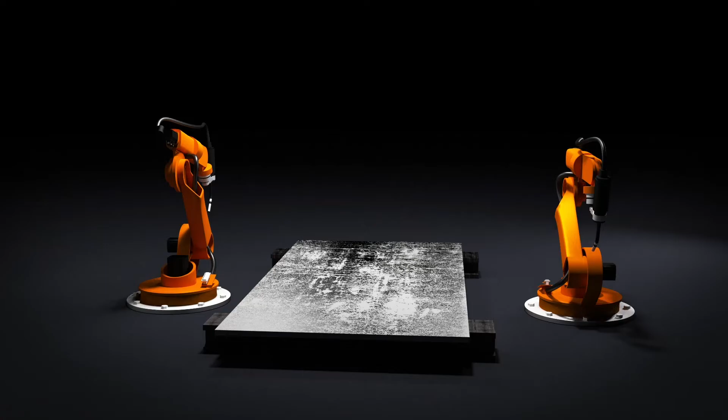All right, here we go.

First blood, first aluminum, first cuts for the project retrofitting Eisenhower's outdoor exterior wayfinding. 2006, you're out, old busted. 2022, new hotness. So I'll give you a quick overview of what's coming down the pipe since we're starting to chew on it.

Like I say, this is first blood. We've got the main monuments out, here's the new one. You got the two side monuments, the two secondary entries, those are out, these are new. And then you got the 12 bangers, the 9 bangers, and the 6 bangers.

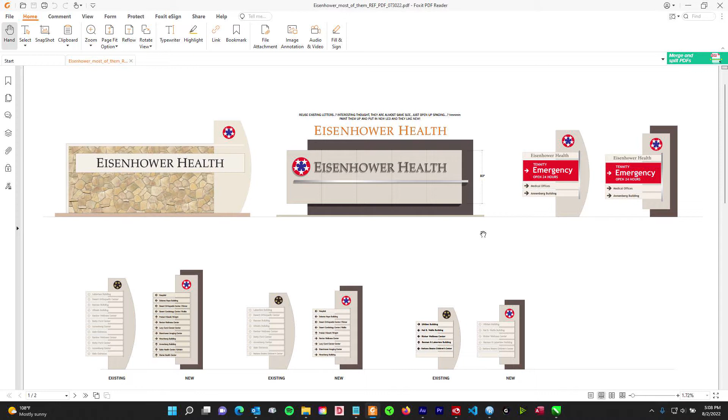It just happened that I started with the smaller ones, not necessarily because they're smaller. It's just that all the rest of these have big poles down the middle, so they're more of the same species. Since these didn't have that kind of pole, but they got taller and basically changed the way they mounted, I wanted to focus my fire on this one first.

So actually this little guy, even though he's smaller, is slightly more difficult versus these other ones here. For those, the pole's already there and I just had to mimic that and translate it into this. But this one, I had to cook up a whole new mounting system. So that's why I focused on the little guys.

But the whole idea is you can see where this one, this one, and even this one-ish are all going to be kind of similar. So you can use this little guy here as sort of a kindergarten. Get cracking on it, and then you'll see the rest of it's going to be...

Dun dun dun na, na, na, na, na, power station.

So power station number 2 actually is the name of that song. Let's go over the lay of the land.

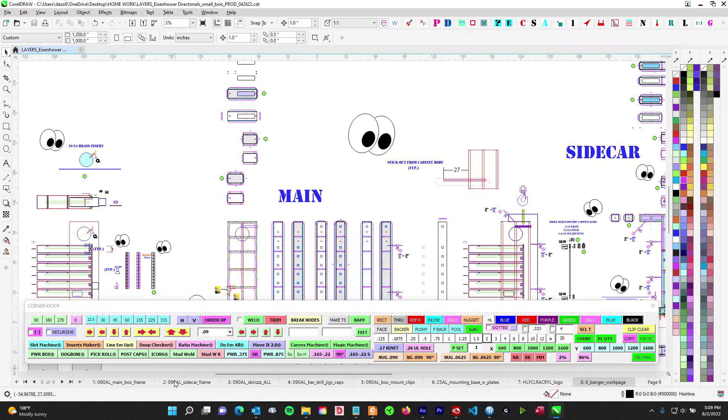We've got ourselves our main cabinet parts here. You have a total of 5 signs for this particular type, so I just grouped everything in quantities of 5, just to make sure everything works that way. Rather than having 15 of everything on one giant piece of paper, I went ahead and broke it down by sets. So just look for that, do your counts.

But this is your main box with the jigs, so look for that. You got your sidecar — this all sounds familiar, right? Got a little sidecar, got a main. Again, look for 5 sets and look for 10 sets of jigs.

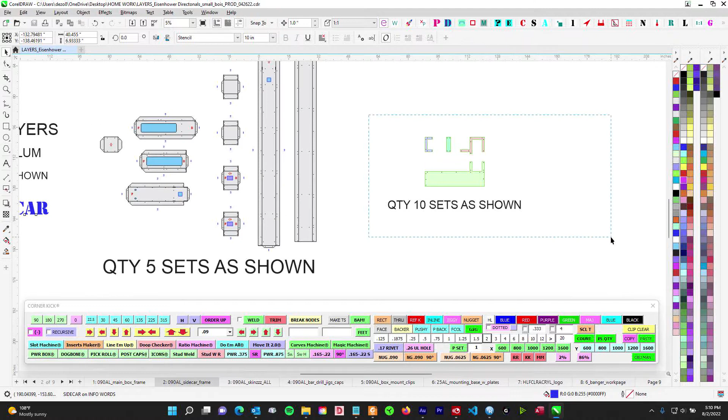To save time, I'm just thinking everything through for you guys — every bend, I think of it. I don't just throw this stuff willy-nilly and make you stand at the brake. Don't curse my name in vain saying, oh, how dare you, always making me bend stuff. If I can try to save some bends or save some jig time or whatever, I do.

Every time I make you guys go to that brake and bend, I think of it and I whip myself a little bit just to feel your pain. So don't think I'm just tab-happy and make you stand there bending all day long. I can feel your tears, your sadness.

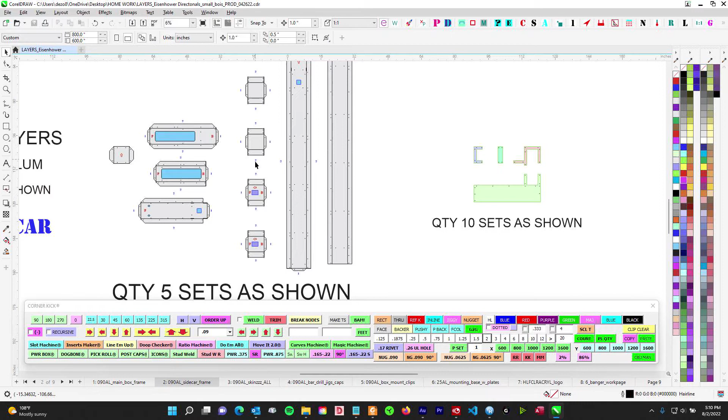Anyway, swing low. So this one is just going to have no jigs. These middle parts here will be jigless, they'll be internal. You have your skins, the main frame.

I do have them directional — technically they aren't, but it's just easier this way. So look for 5 each there. And then these ones for the sidecar are exchangeable, doesn't matter, they can mirror one side or the other, doesn't matter. So look for that.

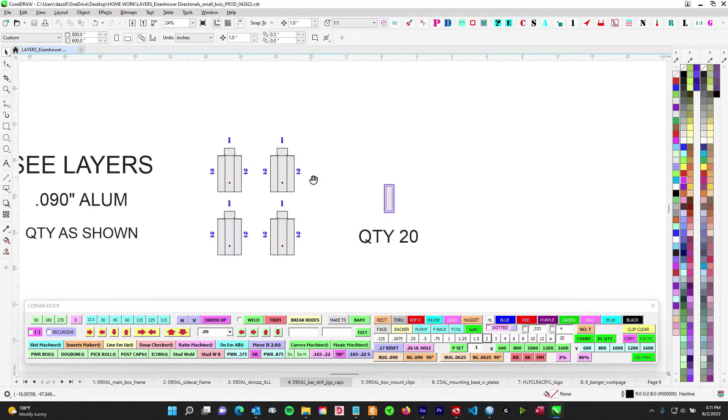I'll go over these little jig bars, these little drill jigs for the bars. We're going to be doing it different than the ones that are there — we're going to flip it around and make it easier. We're going to use riv nuts, and the keyholes are going to be in the skin this time, much easier to get on and off the sign.

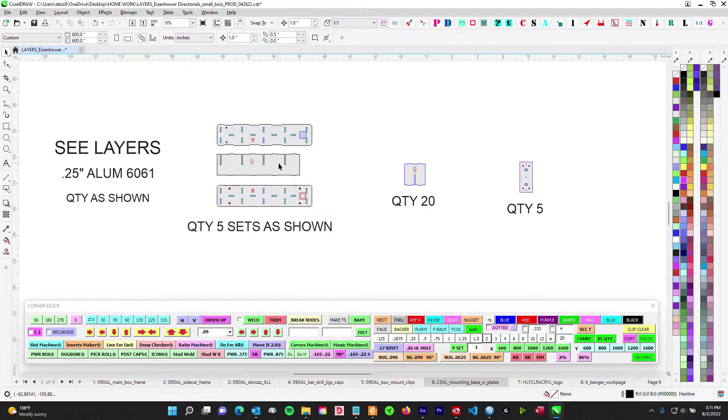So anyway, we'll go over that. You've got your quarter-inch mounting box plate thing. We'll go over that—that's how the new sign is going to mount to the existing one. And then just look for some clear circles. You do have brass inserts.

So like I say, you've got a main box, you got a sidecar, and you've got some mounting box down here. You got your jigs. So I know there's a lot of eyeballs, which usually means look over here, look over there. There's a lot of stuff. But it's nothing we don't normally already have done, even recently.

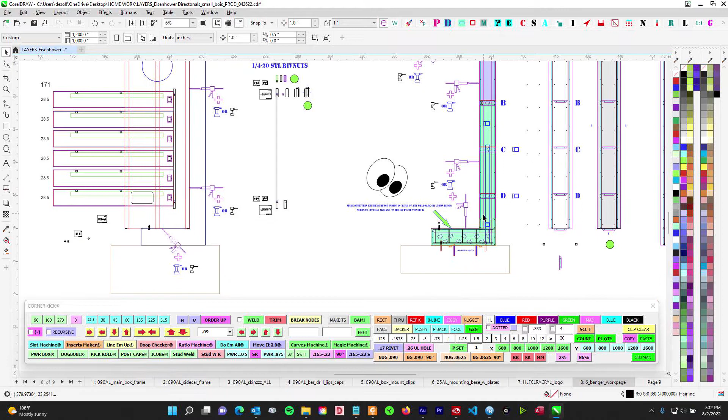You got a main box you're going to build first, and then you're going to go ahead and build off of that. I think that's how you guys do that—you go build off and start attaching those to the side. I want to see Lords and rivet, or go ahead and shoot your screws, either way. But you want to Lords these onto that frame, make sure it's nice and strong. And then you can go ahead and build off of there.

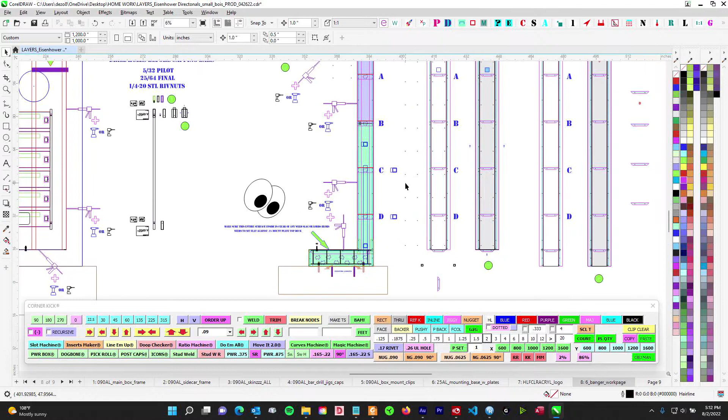Like I said, A, B, C, and D are jigless, so they're going to fit inside and just tack it in. Make sure that I do have C and D—I didn't mark them, so just to save time, but you do have a face and a back. So front, or face, is the way they face towards the boxes. So technically this side here is the F, and the back will be the B side.

So if you see where the little 2x-pole post, whatever tube is going to be, it's towards the back. So you want to make sure these face the proper way. Otherwise we're going to be kind of very sad, because these are going to be locked in. But I want to have that little bit of movement so that when they're sliding this thing on, there's a single lift point up here.

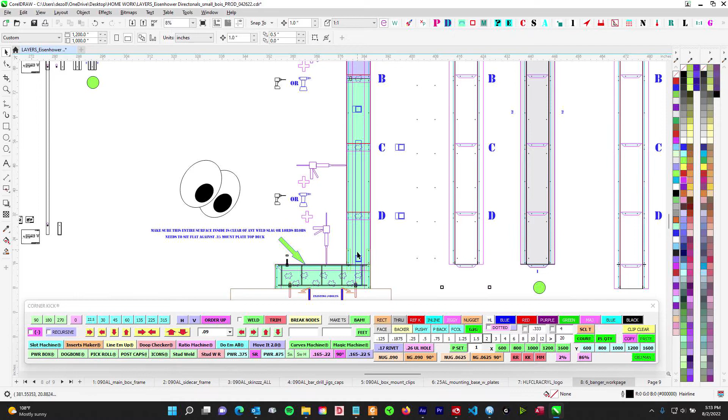They're going to be sliding this onto this piece of tube. They're not going to be able to see it—it's enclosed. So this one here, they'll be able to look under and make sure they get that lined up first. So this one is truly just a straight square, but as it slides up, it's going to hit this one and hit this one. That's why I didn't want left to right, because this is going to lock it in place.

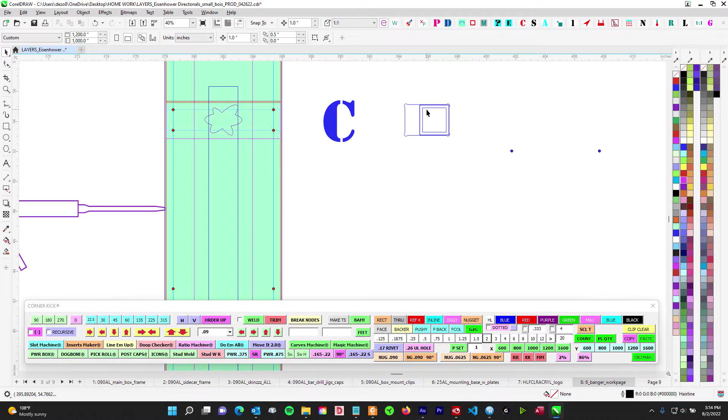But I wanted to have some maximum flow to the front. So again, make sure C and D face the proper way. And then A and B, like I said, they're not marked—it just means A and B don't have the slide through.

Again, with production, every little bit counts. So I didn't want to just chop a hole in all of them, because that would be a waste of time. A and B, for what it's worth, are symmetrical, so don't worry about front and back, arrow. So just again, C and D, make sure those go the right way and that they are the bottom ones here. Otherwise, very sad days in the village—many deaths.

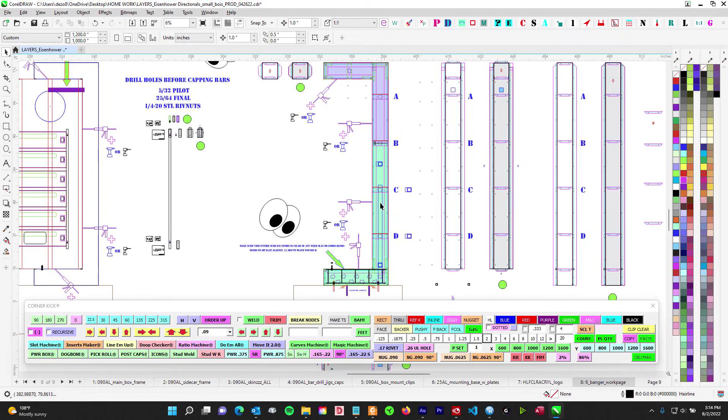So go ahead and build your sidecar off of the main frame. Once you get the main frame all done—probably build the main frame first, I don't think I'd skin it yet though—go ahead and make sure you get this. You can shoot all your rivets and screws from the main frame box into this. You're not going to have any room to go this way.

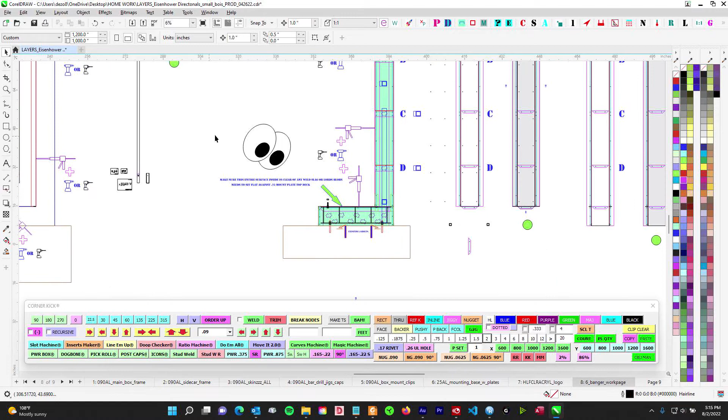So what these eyeballs are pointing out is something we haven't done yet—always something new. As you know, the existing sign just has two J-bolts right here that hold this whole thing up. So there's no pole or anything. We were kind of brave the way we did it, but it works.

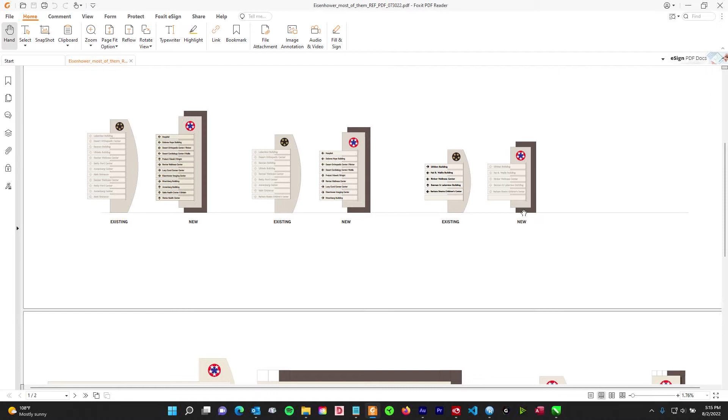But being that this one's a little bit taller and wider, there's a lot more going on, and it sort of cantilevers the weight over more than this one did, because this one counteracted the weight. I wanted a much more substantial way of mounting this. And since this is going to teeter forward, hence that post in the back, that tube—so I did some math, I went ahead and weighed each box.

So you're almost 30 pounds. Just in these boxes alone, you've got almost 200 pounds once you get these boxes installed. So that's why I wanted to counteract the front lean.

So the mounting structure is going to look something like this. It's going to be 1/4-inch plate, dog bone and slot together, as you know. So you have a top here and you have a bottom here.

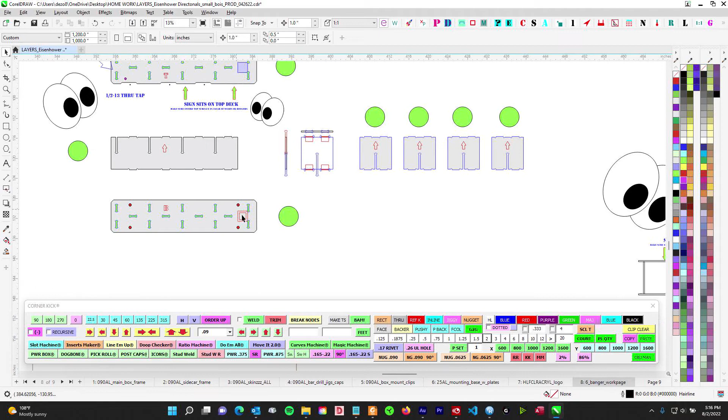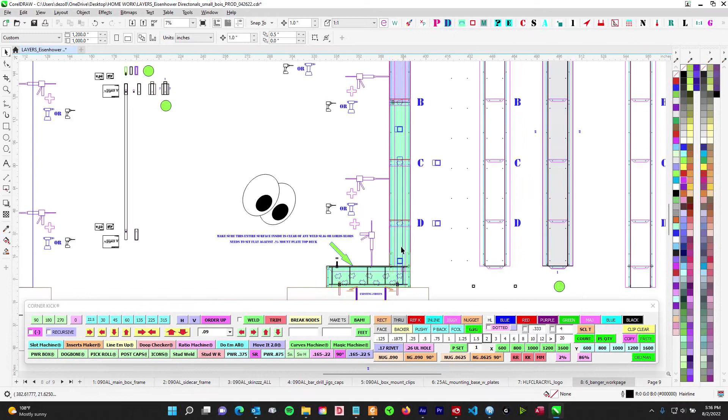And then it's very important to double check that this guy is at 90 for sure, because as you can see, this is going to slide down, bonk. And then I have it right up against the back here. So that way, when all that weight is kind of pulling forward, it's going to lean up right against and lock forward, bonk, and lock forward, bonk.

These are the only 5s that'll have this. So if you want to just go ahead and bring in a stick 1/4, that way you're welding 1/4 to 1/4. It'll be nice and strong. And you can get all 5 of them out of one stick.

What's up, Edgar? So you'll slide that in there.

Again, this little looky here, just throw a quick bevel, so it's easy for them to slide, a little bit easier for it to slide on, because they have to clear this one and they have to clear this one.

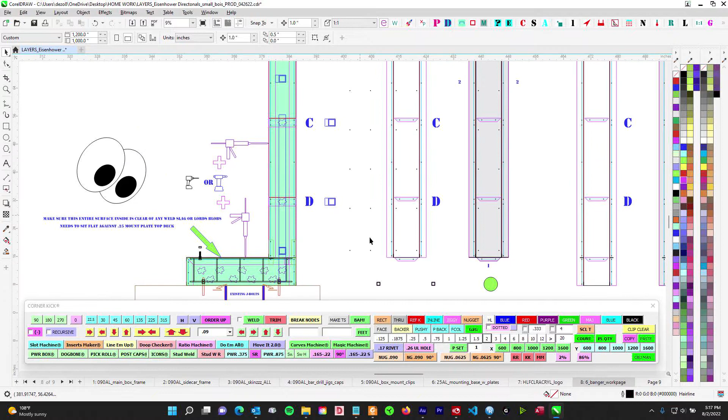So weld this up, and once you get it all tacked together, just burn, baby, burn. You're going to be able to burn this plate to this fully on there. You'll have a nice fillet weld.

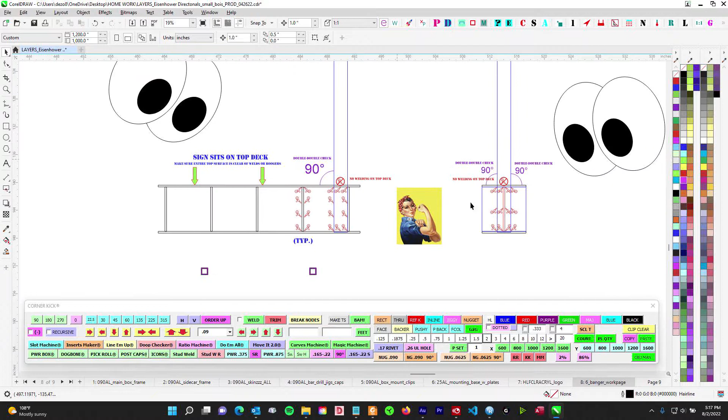That's this plate here, this back plate right there. You'll be able to burn that right on there. And then on the, you'll see there, and then you'll be able to burn this. And then this plate dies out right up against there.

So if you look at this top view, yeah, so this middle spine, which is this spine right here, this dies out right up against the post. So you can see where you're going to be able to get fillet weld. You'll be able to fillet weld this plate right there. So this post will be burnt really well.

But the whole idea, again, this one here, you want to make sure that you keep, there's no welding up here, because this is going to sit, the sign is going to slide over this whole boot thing, and it's going to sit right on that deck. That I'm calling it the top deck there. So that 1/4 inch plate top deck needs to be free of any burrs.

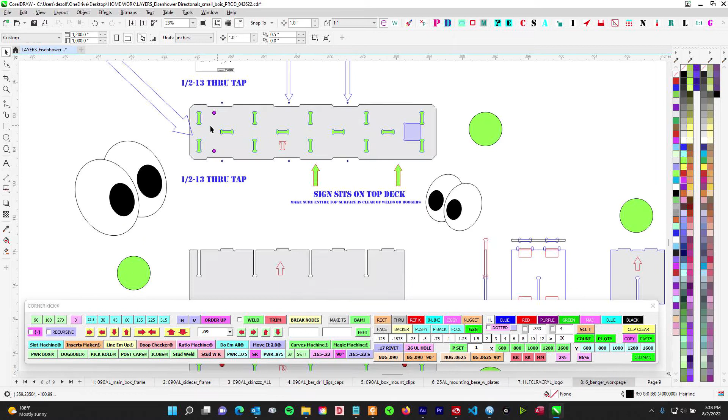It needs to be free of any welds, any kind of accidental blobs or anything that's up here. Make sure you clean it nice. And that's why I'm saying you're not going to weld on the top side around where that is, because the sign needs to sit right flush. But otherwise, you're going to burn all in here.

Everything's fine. The other thing you're going to do, just like you do with our Mjolnirs, so it's the same setup. You got the tools ready to go. I would bring in some taps just to make sure you got enough, but you're going to do just like you do on your Mjolnirs.

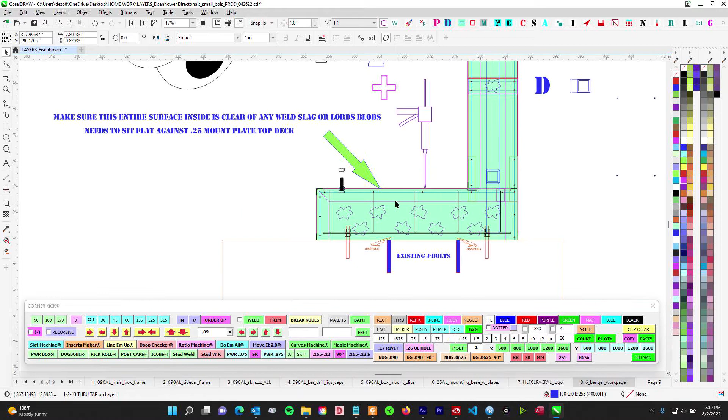You're just going to take your drill and you're going to burn through with a 1/2-13 tap right here and right here, the top deck. Those two are what's going to actually hold down the sign once the sign's put down. So basically this post holds it in place, keeps it from tilting, keeps it left to right.

And then when this slides down, Install has access right here. They'll reach in and they can bolt this bad boy down. And then that way it'll keep it from moving around. So again, that's all you got to really do to this is burn it up really well.

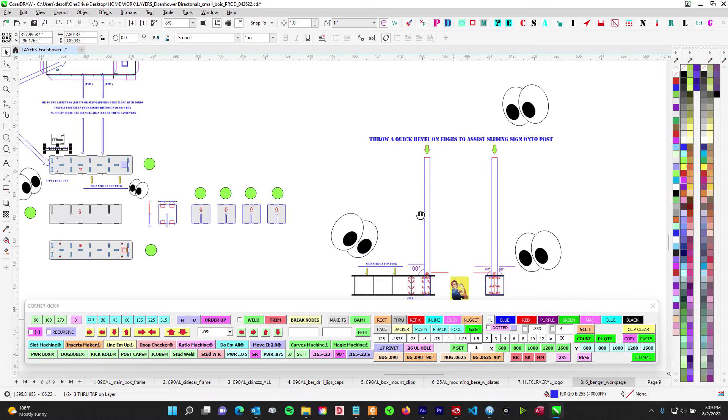Make sure your stick is square. Keep all your welds below, make sure it's clean. Then go ahead and tap it, run through, and you can wait till after prep or whatever. I have a 2-inch bolt right here.

So a 2-inch fully threaded bolt goes right through, and that gives plenty of room, I think. So maybe a 2-inch will be fine. More is better, it's fine.

So now you can see where all of this takes up this bottom cavity. We haven't really done this before. So all I really did was, instead of how in our monument signs we have a 2.5-inch pocket down here for our Mjolnirs,

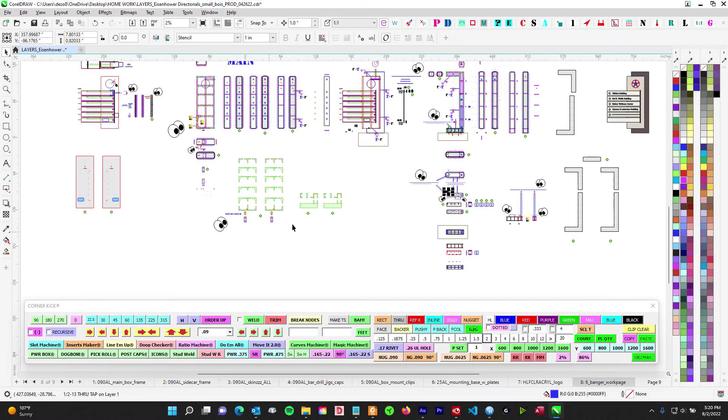where we take the bottom and flip it over on all of our monuments, all I did was stretch it to 8 inches. That's all. So you just have this uber jig cavity here.

So this is all one big inside jig. You're just going to tack the frame around it like we do. You can even tack it on the inside there and clean it up, and you are clear. You can see how much room there is.

You can weld on the inside of this pocket cavity inside the sign. You can weld all the way around there as well. Make sure it's all fine in there, because you can see how much room I have here.

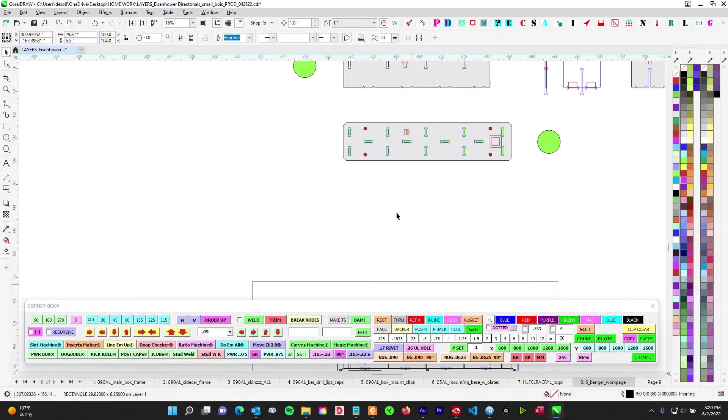Now, that being said, once you're done welding up in here, you can weld the jig to the flange on the inside. Then you can weld it around the outside here, get down on it, make sure it's nice. But once you're said and done, you want to get back inside here with your little peanut grinder.

You want to make sure that this inside is completely clear of any weld blobs that might get in there or any welding slag. Because again, this surface, looking on the inside of the bottom here, this whole surface of 09 needs to sit nice and square against that quarter-inch plate, that top deck I'm calling it.

So anyway, that's all. Just make sure that's all nice. But I think we'll be fine, because this runner here comes all the way down.

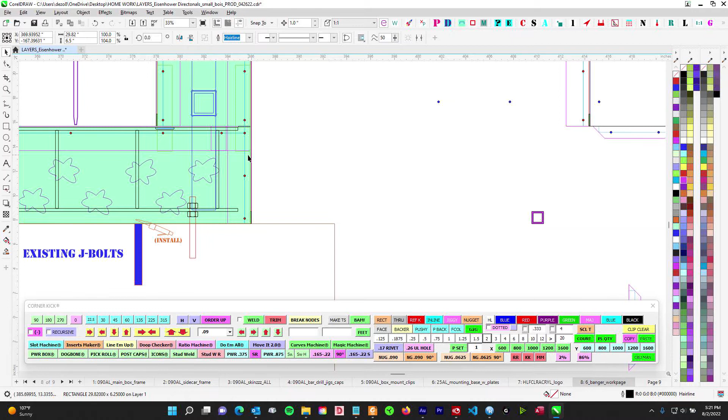So essentially you have the face of 090, you have this frame of 09, and you have the underneath 09. So you're almost pushing 3/8 of an inch close, or whatever.

So I think even this sign sitting just on the ground in the shop should be fine, because you'll have skin 09 this way, and then you'll have another piece of 09 jig all the way across. So for strength, I think it's going to be fine, but it's essentially one big fake skirt.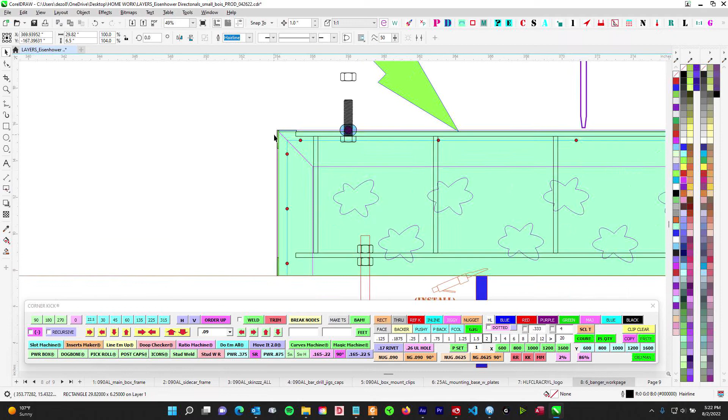So I know on install, for Jonathan, the other signs have a little removable thing here. You don't have to worry about any of that. This whole sidecar, other than the top lid for lift point access, the entire thing is sealed up, which is awesome.

So just Bondo it, clean it up for prep, and we're done. You don't have to worry about little doors and little openings, so just this bottom one, you slide that off. That'll be your access to get to there, and that's it.

So I think that's it for sidecar. And then, like I say, this is just an 8-inch version of our flipped over design. Just make sure all in there is clean.

But you can weld all here really good, make sure it's all good. Now, when you go to put the skins on, you're thinking, remember the Indio letters, these little splooches look familiar.

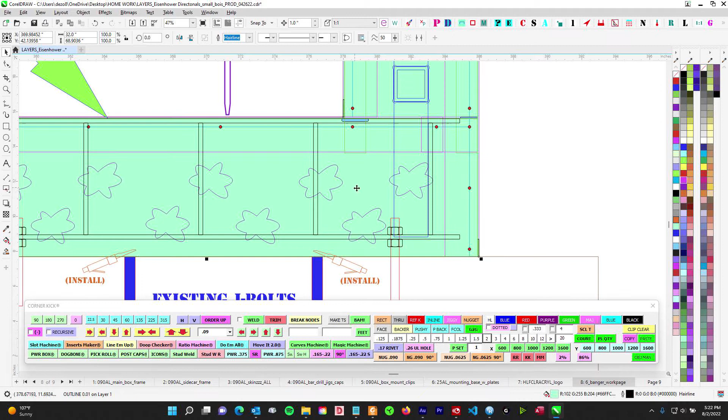As I just said, you have 090 frame here, and now you have an 090 void. This whole thing is an 090 void above the skin. Now on the Indio letters, I gave those little discs to float, saving time, whatever.

I think we're okay here. You're just going to Lords really good all the way around, and then go ahead and just put some good blobs all in here, like good quarter-size blobs. And then that way it'll squish out.

And once those cure up, I think those will be our connector buffers between the jig that's back in 09 and then the face that's 09 forward. So that's that. And then, like I say, the one downside of the jigless design is that these are back in 090.

So you don't get that Lord's love. So again, just go ahead and put a blob on these. And then that will carry out that, I can get rid of these so we can see what's up.

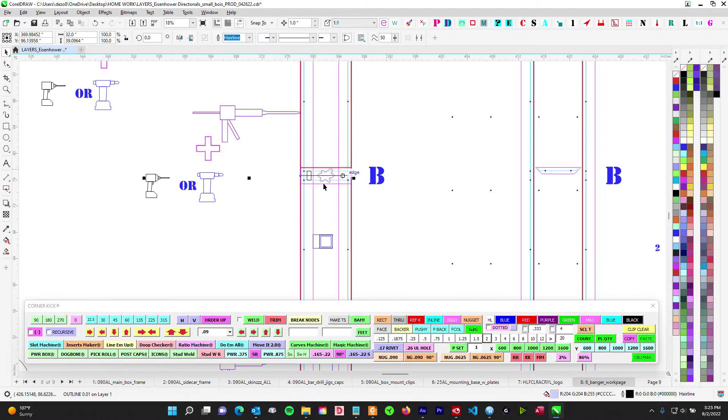Make sure you blob these up really good. This is only 8 inches across, so it's not that big a deal, but again, it's unsupported right here, so go ahead and blob it up really good.

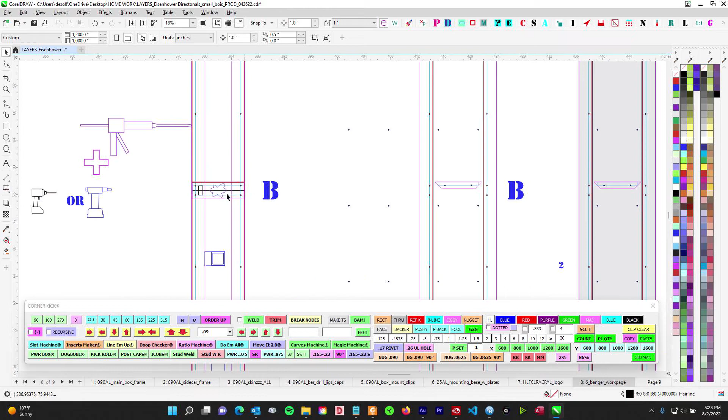And this is a seam as well, so I don't usually like to leave a seam live like that too much. So again, it's going to be very important to just goop it up really good and let it cure. Let it squish out the seam, maybe even inject a little bit in there and then scrape it. That way it'll seal it right up. But you can see where your skin is going to be right there.

So I tried to keep it simple, less jigs, that kind of stuff. And right here too, I don't really have a crossbar because you need access for your lift point straight through. So this is just a piece of metal, a single piece. So don't lose that one. There's not going to be any descriptor on it, so it could look like just a little piece of scrap floating around. So just keep an eye out for that, keep a weather eye, Lords it up, and that will give you a little splotch point too right there.

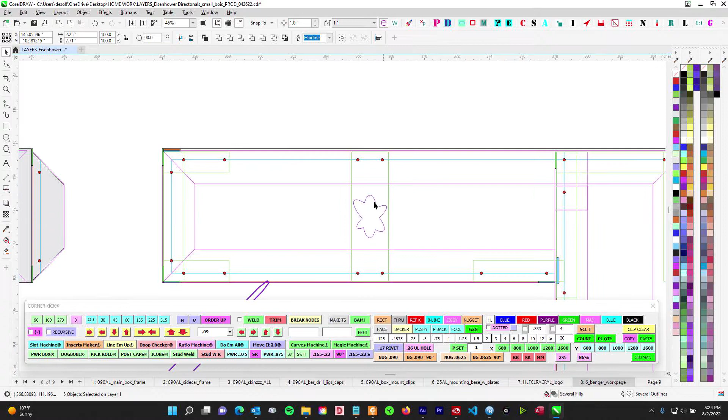All of this is exposed frame. This will sit fine, that's all good there. But put a little splotch there, and that'll seal that up. But you do have a door on top. So that's sidecar, and I think you got all that now.

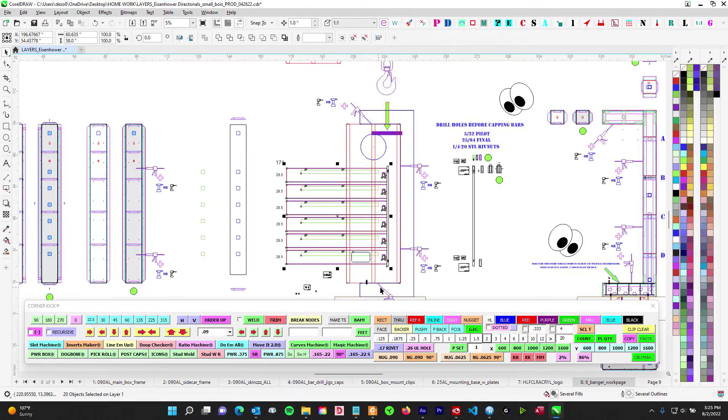So then we'll talk about mainframe. Mainframe's super simple, other than, like I say, you got 200 pounds, which isn't that bad. But once you get this all installed, you got 200 pounds, and that 200 pounds has to work its way down to basically these epoxied in studs through the 1/4-inch plate frame.

That being said, I kind of wanted to beef up this main box, so these jigs are going to be beefier than normal. Because they're going to be taking all that stress from the 2x2s and working it through the face and shear, through these 2 bolts and then getting it to the ground. So we want to make sure that everything's welded up nice and tough. Just weld it up good.

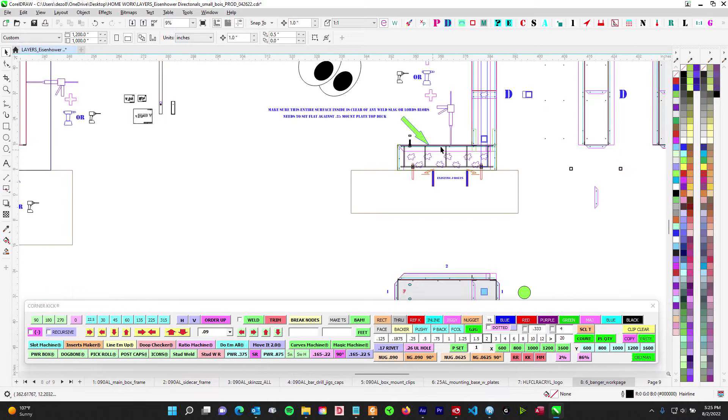I do have a notch here for that plate, so you're going to have a piece of 1/4-inch plate. It's universal. I do have the 6 points here where you can mount the for Lordsing and whatever. I have 6 Cleco spots that match - there it is, so I got these 6 Cleco spots here, so you can line up the mainframe with the sidecar here. But of course they go there, so that's all these holes are for, so you can clearance whatever hardware you decide to use to put these together.

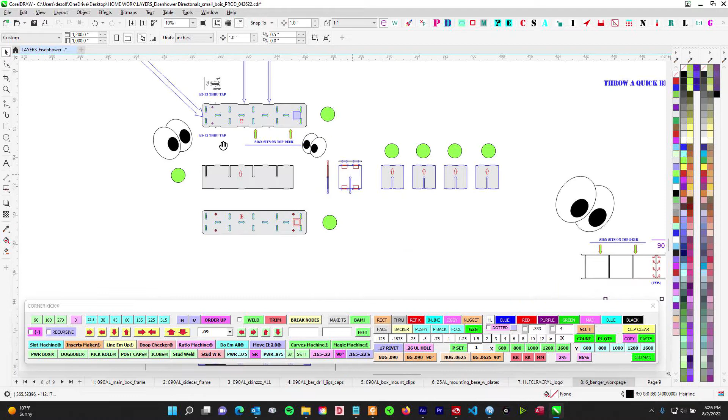But look out for that 1/4-inch. That 1/4-inch will notch in, so you can weld that 1/4-inch really well to the actual jig. That way we're transferring massive load through here, make sure it gets to the 1/2-inch bolts, and then the 1/2-inch bolts get it right to our epoxy bolts. So everybody's happy, physics is happy, Isaac Newton is stoked with his apple and all that.

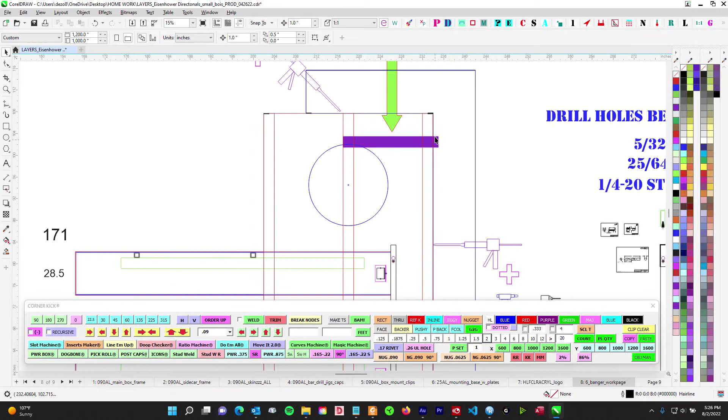So I think that handles that, nothing you need to worry about. You do have a slide through here, just a 2x8 is fine. The 2x2 single lift point works its way through both, and that way it's catching both here nice and strong, but you have access through the top install. You'll go straight through, I think a single cinch will be fine. This isn't going to weigh that much.

So, okay, so you got your frame, you got your sidecar built onto it. You know what you're doing here, you got this all sexy. So let's talk about our clips here, the clips and the bars.

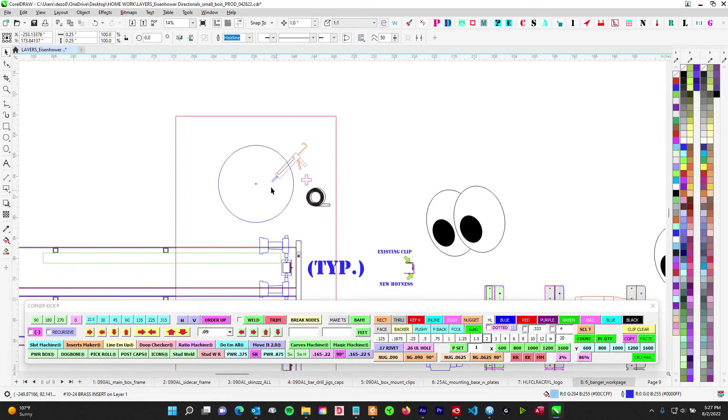Let's see real quick, I'm going to go to the brass insert. Heads up, you do have a brass insert. This is just a piece of 1/2 inch, doesn't get any easier than this. You're going to just do a 1/2 inch clear, tack in, knock in one brass insert. It goes out to paint, this is just going to get straight vinyled. And that way you'll have one single hole in the face. That's all you need, a 10-24 stud, like 1 inch, and that way it's instantly aligned.

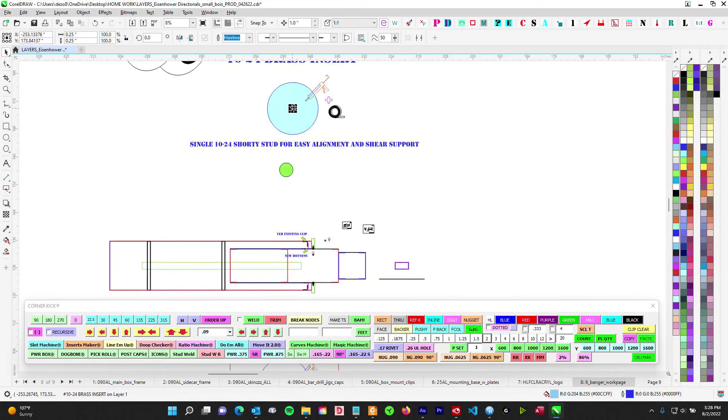You'll just do silicone and some tape, and then you can steering wheel it on there and make sure it's nice and straight. That way the vinyl shop doesn't have to worry about a level line or anything, they can just go crazy with these and slap on the vinyl. When it comes time, all you got to do is put one little stud in the middle that lines you up in your hole, and stick it down, good to go. That gives it shear strength, it'll never slide off. Don't worry about reaching in, you're not going to have access. You can see where it's actually behind the frame strut on this side, so don't worry about putting a bolt on it. That's it, just silicone and whatever.

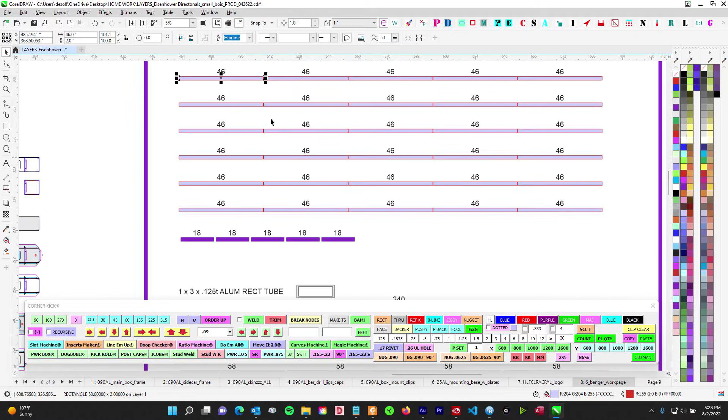Now that's it, all that's left is the bars and the boxes. So let's look at what you got to cut. We're copying what we already have existing-ish, so you're going to cut these at 46. This is just 2x2 by 1/8, keep the weight down, keep it cheaper. It's all we need because each box is only 30 pounds, so it's fine. You got one stick, you can cut all of this. This is good for one job for these particular signs.

Going forward, the other signs have the pole down the middle, so don't get ahead of things. I haven't figured that out yet, but I think the pole is going to chop these, so they're probably going to be shorter. I have to figure out how that pole is going to attach.

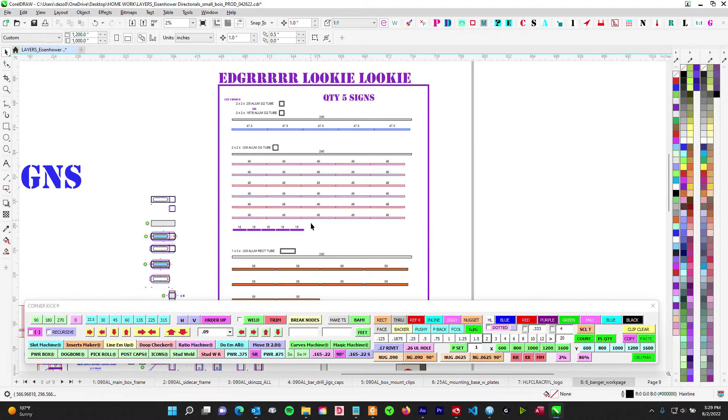So this is only for this job, the 2x2, but you will have a whole bunch more of this coming. If you want to bring in a bunch of 2x2 by 1/8, feel free, we're going to need it. Also the 1x3 by 1/8, this is enough for these. The other signs are going to have those too, and they're even going to be longer. So again, if you want to just bring in a bunch - I forget what our numbers are on these, but they're more than these. We got plenty of material requirements coming.

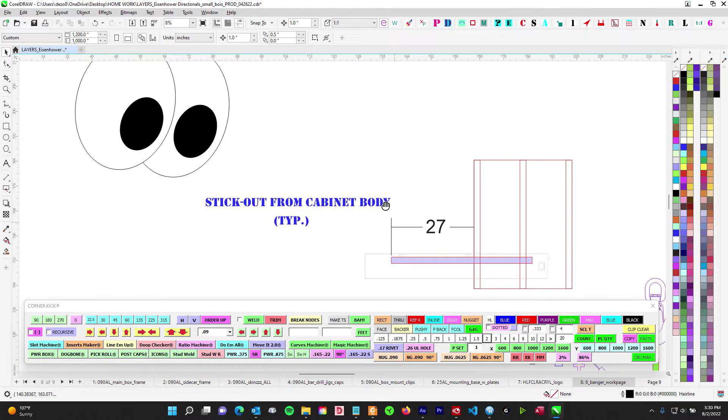But you do want to make sure it's strong. It is a double-edged sword, but you want to weld it to the 09 face very well, and weld it here. You can weld it on the backside too, it's fine. You can weld it back here, or weld it on the inside, either way, but you want to weld it here. Now keep in mind, when you add up a 2-inch weld here and a 2-inch weld here and a 2-inch weld, it's going to want to shrink this whole face.

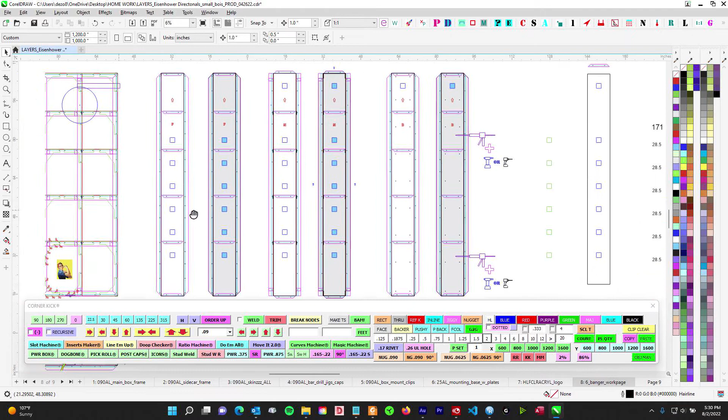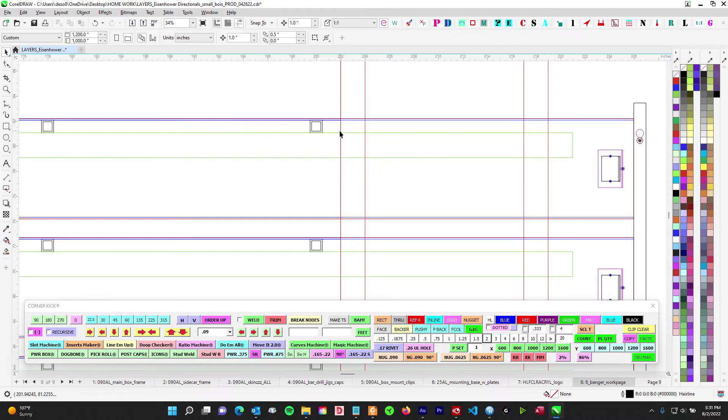That's why it's important that we have these bigger jigs to fight the warping and the shrinking and stuff, so just keep that in mind. But it's important - I don't think we need 8 linear inches, I don't think you want to burn the whole thing all the way around. If anything, maybe you want to burn horizontally, because a vertical burn of 2 inches is going to shrink it that much. But if you go across the top and the bottom, then the shrinking is going to happen horizontally, which I think is better. But we don't want to burn - we're not looking for Instagram weld porn.

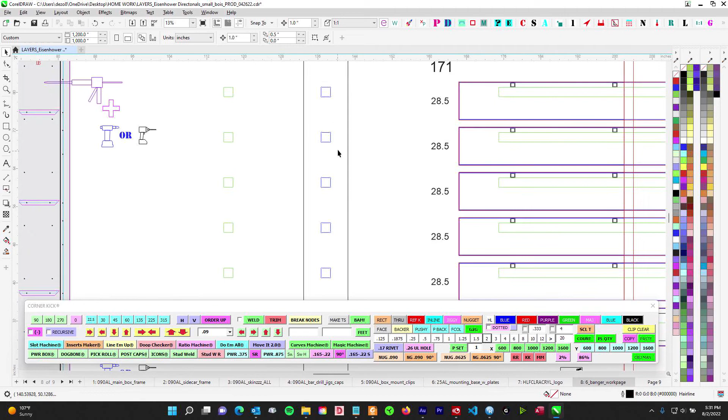You don't want to burn all the way around, but we do want to burn these in pretty good, so use your judgment on that. I think maybe top and bottom burns, George burns, might be better, because full 2-inch beads all the way around is going to want to shrink this whole face pretty good. It's going to put a lot of stress vertically. That's why I say make sure you tack these in pretty well.

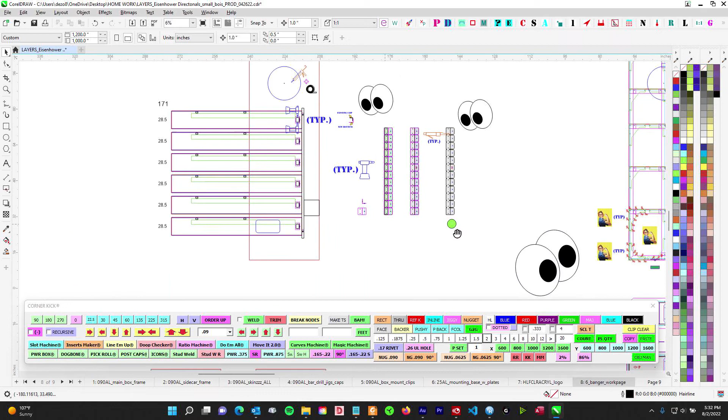Throw on maybe some little welds or little beads instead of just tacks, because it's got to hold up all that weight, and it's going to put up with all that stress and tension when you go to shrink that face, when you put that heat into it. So necessary evil, like I always say with welding - you got to weld, but it sucks because it destroys everything.

So anyway, build the frame, slide those in, get those welded in. I think you're good to go at that point. Then your sidecar's all done, and I think you can close it up. Make sure this guy's in there.

I don't know if you want to just Clecos that in - I got 193 Clecos. But I don't know if you just want to tack it, because you're going to be tacking this in here anyway, so you probably could just tack it around the edge, make sure it doesn't go anywhere. It's going to get sandwiched, that's fine. So make sure that's in there.

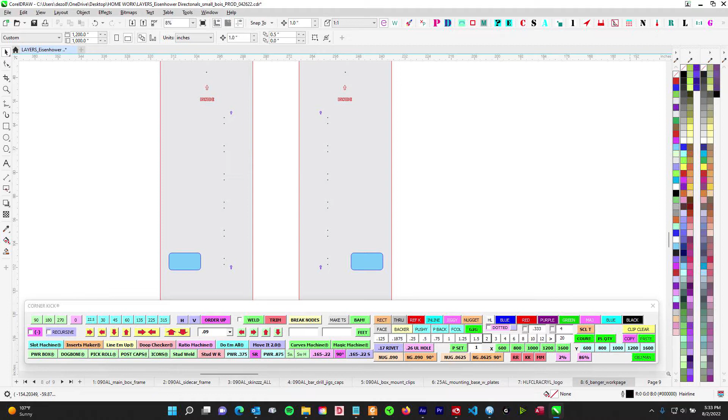And then I think that's good. Then once you get your faces on, you want to Clecos these on. Let's see, I haven't sent these yet, so I want to make sure this is really clear. I'm going to put an F here for the front just to make sure you know. I can assume that you know, but the bars are to the back, right, and this little cutout's to the front, but I just want to make sure, so I'm going to update that. Holes to the front here.

And then you're going to go ahead and Clecos these on, close it all up, and then Clecos on the sidecar faces, close all that up. You're fine. Once that's done, I would powwow with John G as far as the clips for the boxes - what do you want to do there - because you're going to rivet these on.

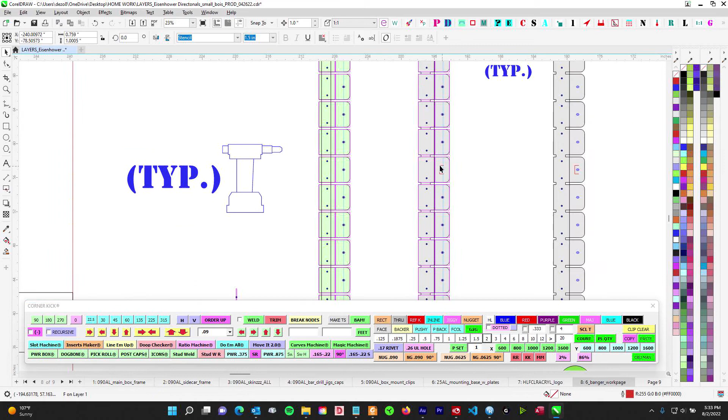So here's what's up. I'm just copying reverse channel tabs. You're just going to take 09, you're going to clamp this side, right, clamp it, bend it 90. Perfect.

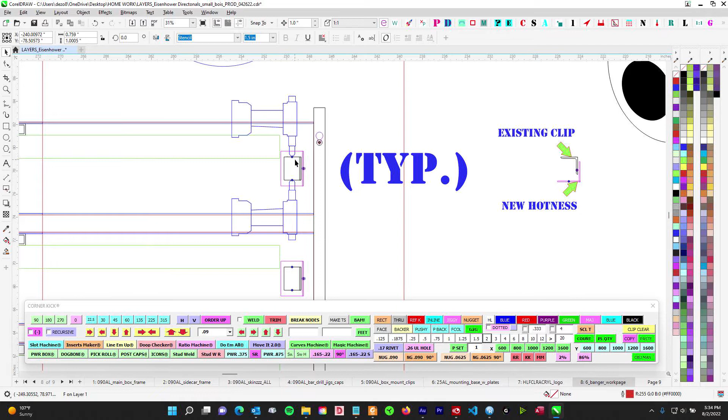Now you want to rivet these on. I know sometimes you play it fast and loose and sometimes you use self tappers instead of rivets, but the self tappers - this isn't clearanced for a bigger hole and then a smaller hole, and it'll never clamp, and you're going to get shavings underneath, and they're going to be 4-by. You want to just cut these off and then rivet both sides, especially now that you have air back in the shop. You're good to go.

Rivet these on. Now that these 90 clips are going to be sitting there, does John G want to deal with that? Do you want to send this to paint after? And do we want these painted?

Don't even cut them yet. Maybe you just send this stick out, he paints this, he paints all this, and then with some time before you get cracking, you can go ahead and cut them and then just rivet these on like as a last minute thing. Or we don't even paint these, but we just paint this.

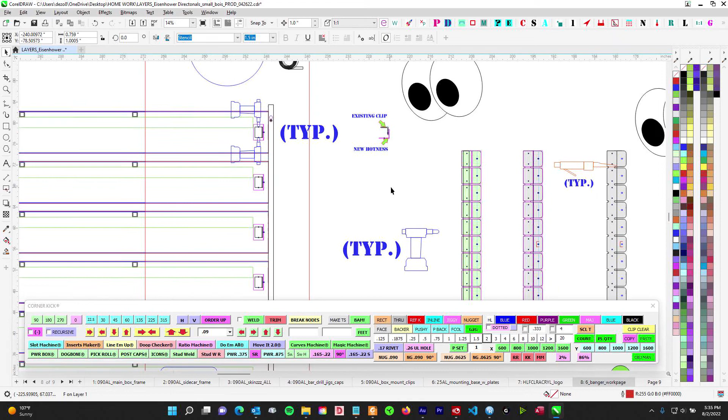Whatever's easiest, work it out with John G, whether or not he wants these clips. But the idea is, just like reverse channels, you're just going to bend this as one, and then don't worry about it being pretty. You're just going to cut down the middle, whether it's a bandsaw or whatever, and then make sure the burrs on the back are kind of cleaned up.

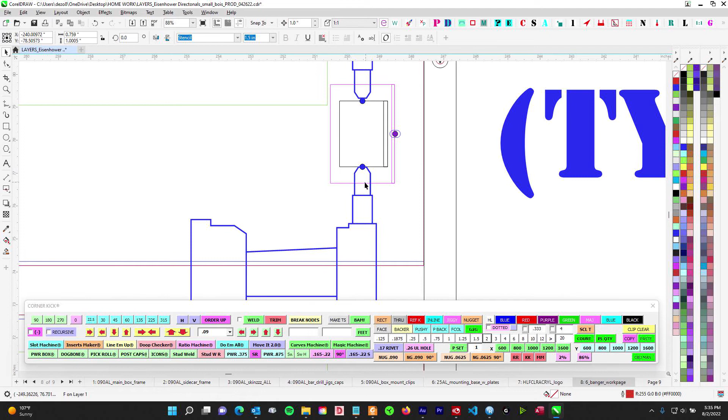But you don't even need to flush cut this, because nobody's going to see it. Even if the little cutoff tab is just sitting right here, nobody's going to see it. The box is going to slide over it. You'll never see it. So kind of down and dirty kind of thing, but it's going to save us so much time.

What took us months before, or weeks let's say - it did take a good solid week to make these tabs out of 2x2 and all that. It's just going to be almost instantaneous. So we're so far ahead of the game, it's great. I give you one extra tab, but there's 12 tabs here - that's enough for all boxes here.

Talk to John G about prep. It might be easier just to leave them off, so they can sand this smooth and paint it, and do that after. I'm always a fan of getting your fab done before paint - just be done with it, that way you don't have to deal with it later.

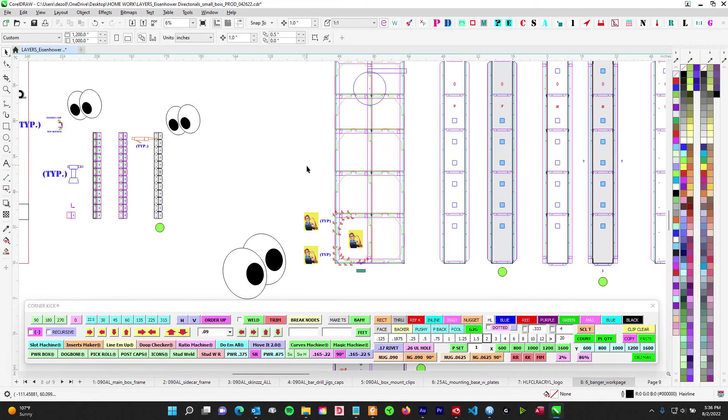Okay, last thing is the bars. So the bars, I flipped it around. Before, in my inexperience, I put the keyhole slot on the bar itself, and it took a lot of fabbing and filing, like some kind of animal, and I wasn't in control of the router then. But now I'm having the router do the keyhole, and the keyhole is going to be on the face.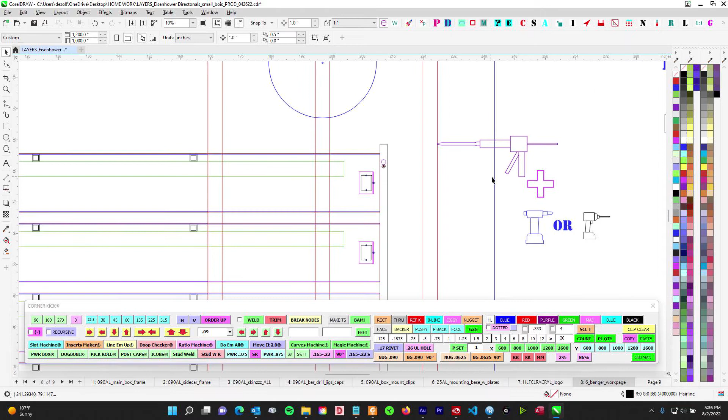So the faces have it here - there's your keyhole. And what you're going to do is, I got this cool little jig. You're going to do 1, 2, 2. I know it's a pain to be at the brake for everything, but it's worth it. All you're going to do is cut these to size.

58 inches is your overall length. So again, here's another eyeball. Before you drill, or before you cap, just slide this on, do a 5/32 hole this way, and it's the same one on the bottom - just hit the bottom, do your 5/32 pilot, you're good to go.

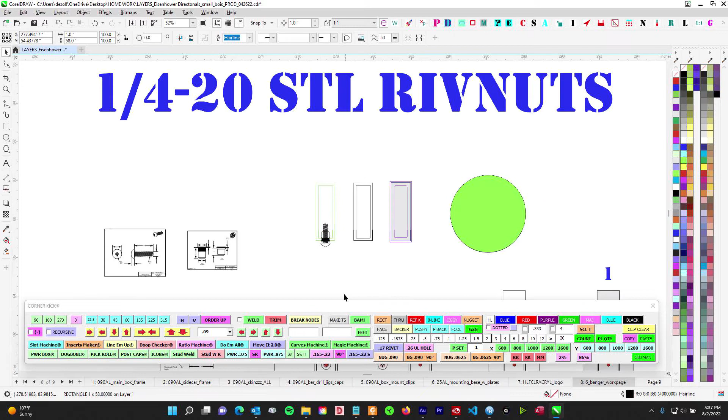At that point, bring these in and take it out to a 25/64 final, and then make sure we bring in some 1/4-20 steel riv nuts, not 5/16 - let's do 1/4-20s. And I'm going to bring in these bolts. I'm going to have special bolts for this project because these have a wider head than what we have on the shelf, and this will be perfect for our keyhole slot.

So you can see how wide this head is - I think that's going to work out great, it'll make it a lot easier. You're just going to drill, riv nut, and do your post caps. Once you have this all drilled, you don't have to worry about accuracy or anything, and then send them out. So these get painted, and that's that.

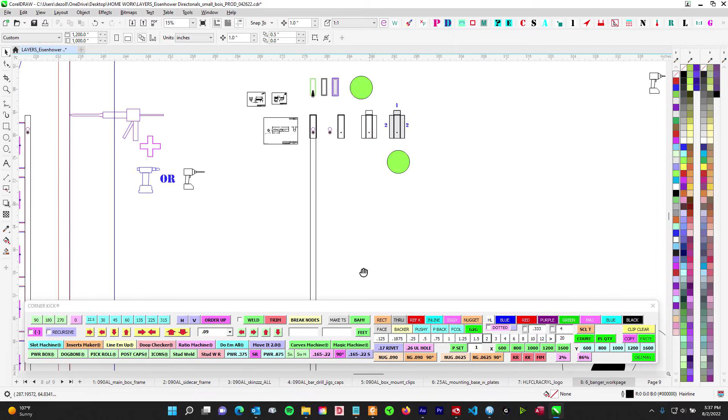So I gave you plenty of drill jigs - these are going to be the same drill jigs for the whole project, for every single bar we do. I got plenty of them because in case they wear out a little bit, don't worry about it so much.

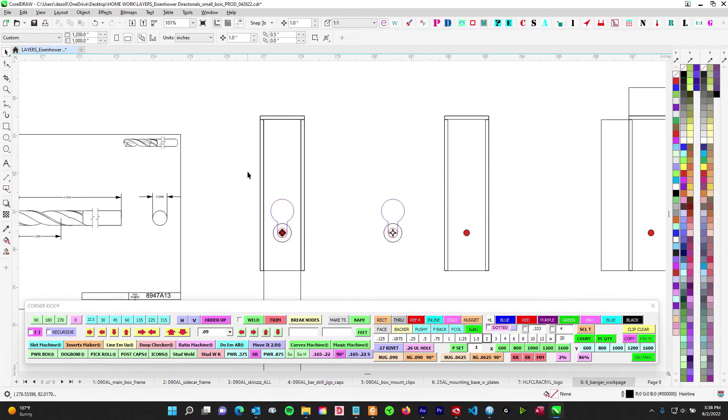5/32 pilot hole, and then slide it. Now what'll be cool is you'll be adjusting, because I did calculate for the thickness - they give you the thickness there, so it'll actually slide on the riv nut. Let me get a side shot here - there it is, so it's going to slide on the riv nut, which will be nice.

And then it's actually going to float the bar a little bit, so there's only 2 points of contact, which will make it a lot easier. Having this float will help - when we took the other one off, there was a little bit of corrosion, a little bit of dirt, and after several years this thing doesn't move. We were banging on it with a hammer - well, we actually were banging on it with a brushless impact driver, which is basically a hammer.

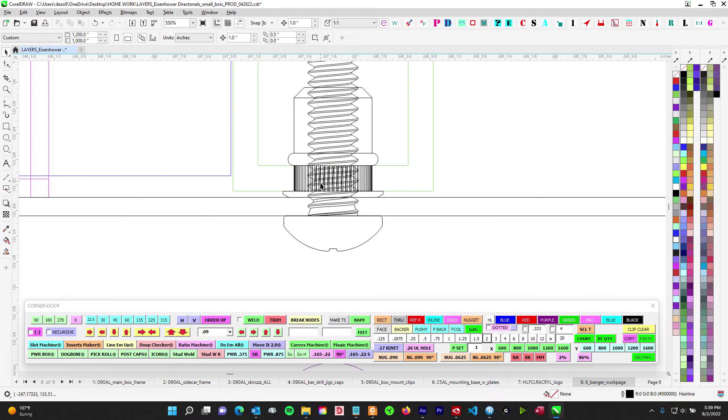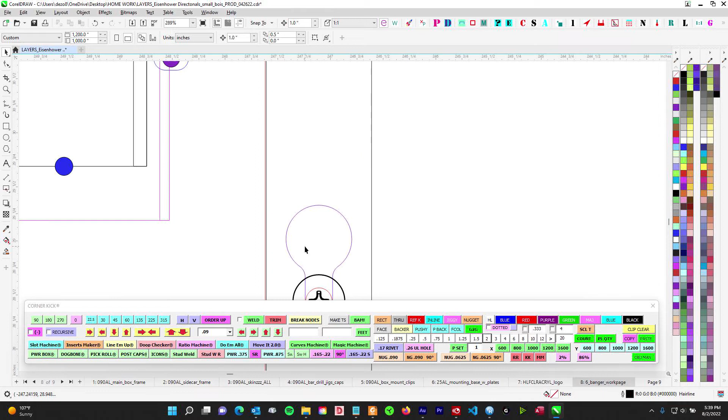Everything's a hammer. But you'll use this to sort of tighten - you'll have to adjust the screw for tightness, but I think this will be superior as far as how it slides on. And the top one, just so you know how it works, it rests and that bottoms out. I went ahead and, lessons learned, stretched this one so it does not bottom out, so that way it's easy - it hangs on the top one. The bottom one gives you maximum adjustability, and then you just kind of fine tune them.

Since this is 090, you can take a piece of 090 and use it as a guide when you go to screw these on. Just take a piece of 09 as a gauge, stuff it in there, drill it down, seat it, pull it out, and back it off a little bit. Maybe we talk about putting a little Loctite or something. We'll have to cross that bridge when we get to it. But that's the idea behind those.

So that takes care of bars. Sidecars handled, skins. Okay, so last part here is for install. You guys are winning too. I made it easy for you guys, really easy. As you know, there's that. This is the size of the footing.

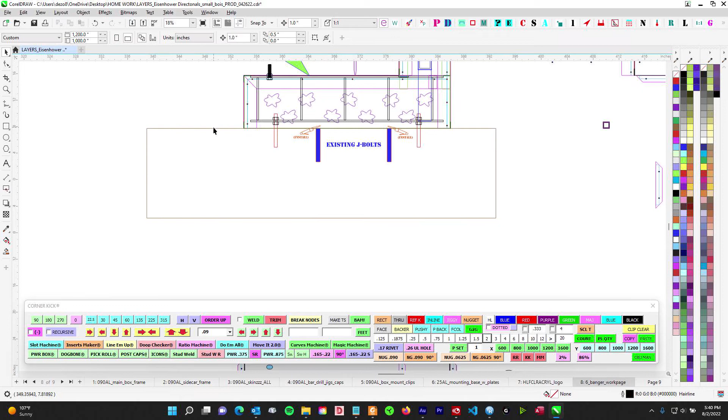So what you're going to do is go over, take the sign off, cut the existing J-bolts like we talked about. They're in this area right here, so there's no conflict there. I already talked to Jonathan, so you're going to do the counter nut method. You're going to Hilti these in — these are 1/2 inch studs. You're going to Hilti those in like we do, and then counter tighten bolts or nuts.

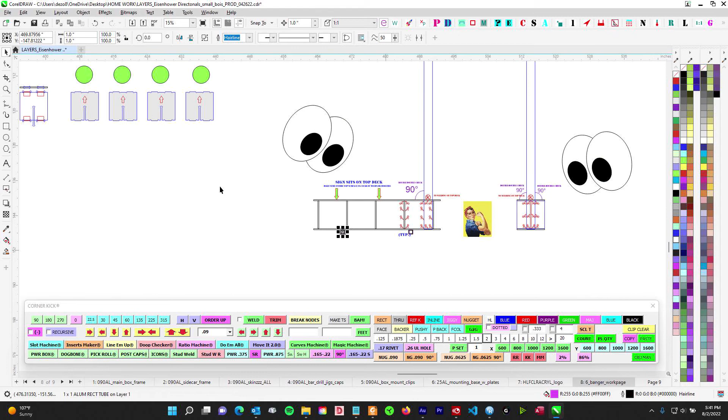Now, to make this really simple for you, what you're going to do — and Fab, you might want to do this for them if you want — is take some 1 inch square tube cuts, because the base is only 7 to 8 inches wide here. So if you take some 1x tubes that are about 16 to 18 inches wide, take 2 of these little tubes and lay them across.

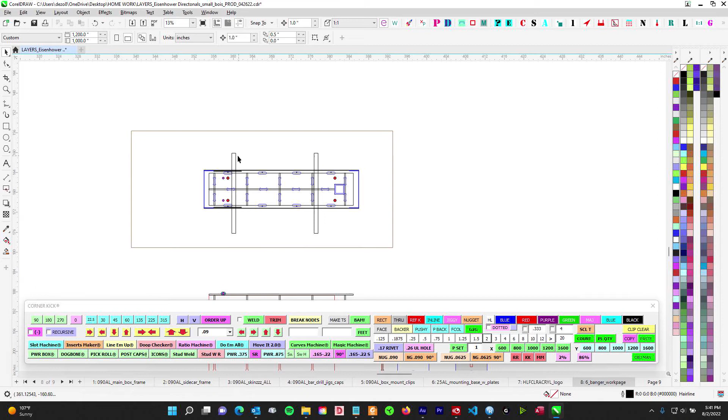You'll use your template. I'm going to give you a template — you'll drill it, epoxy in your studs, and you're good to go. Then take 2 pieces of 1 inch square tube, lay it across like that in between where the studs go. I think I got it here. There you go. Let's bring that right in.

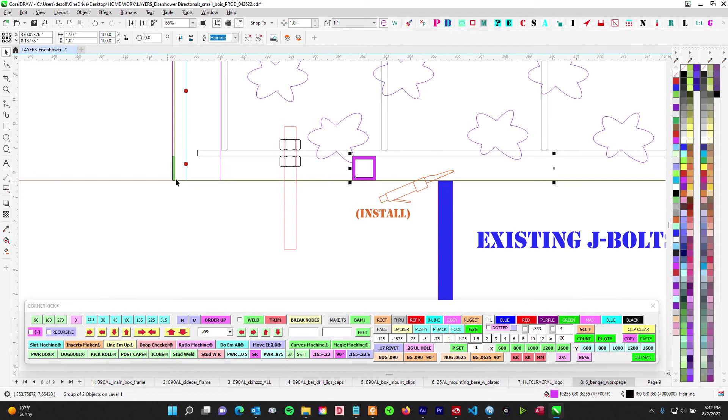So you just put those tubes right there, and then all you've got to do is counter tighten your nuts up against there. Now, where this sits perfectly against the quarter means it sits perfectly against there. So every little 1/16 of an inch that you put it up means you have a little bit of room there. That's all you've got to do. If you let this sit directly against the 1x, the sign will probably — and in some places, if the concrete's up, it might not — so you want to have a little bit of love.

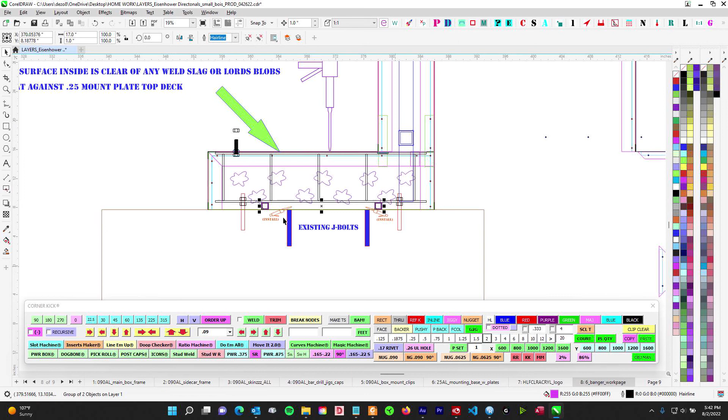So even if you just lift this whole thing like a 1/16 off, then slide your tubes out, that's when you'll know the sign itself will have a nice 1/16 float. Water can go underneath it, all that. So that's really easy, I think, for you guys. You're just going to have a wood template, drill your 4 holes, get it out of the way, epoxy in, slap a couple sticks of 1x, put your little mounting strut thing here, put that down, and then you're good to go.

So I think that's really simple for install. I'm going to go ahead and make the wood template — about as wide as this, but as long as the entire piece, since these are all pretty much the same size. So I'll make it a 54, and that way you can center it up, do your measurements, and just hit it. You're good to go. So I think that's install, that's fab, I think it's all good.

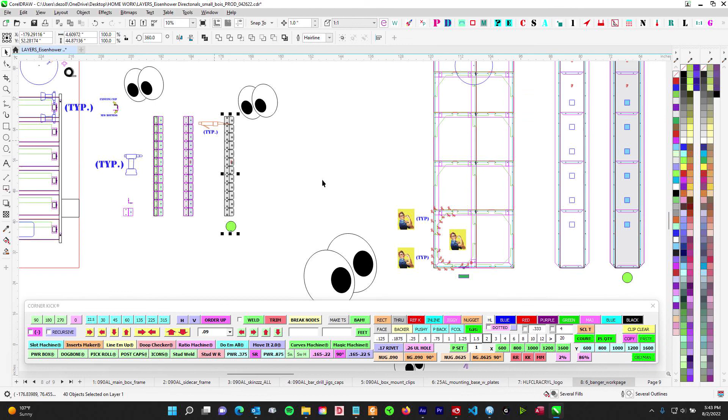Again, go to town on these because it's just going to be more of this — more of these, just more. So whatever you're doing here, if something's not working, hit me up so we can shift course and make corrections for the ones coming after this. But yeah, go to town on these. Otherwise, that's it. Good luck. We're all counting on you. If you have any questions, hit me up. Check.